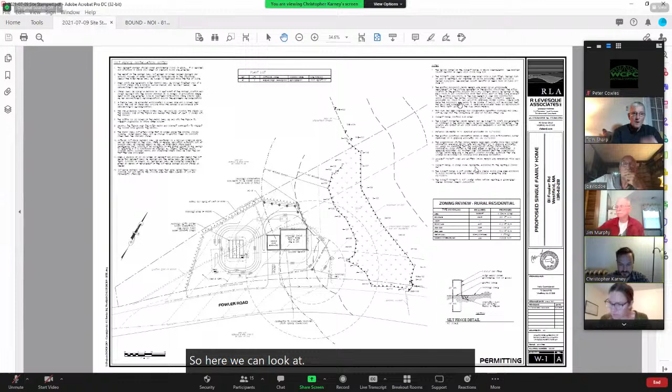So here we can look at... Is everyone seeing this plan? Uh-huh, yes. Just trying to make it a larger size for everybody, but I think I can just zoom in and work well with it.

So the proposed project is a single family residence here, and associated with that is a driveway and septic system. It would be a raised septic system with gravity flow to a septic tank, then to a pump system, and then a raised bed leach field. As you can see, the septic system, including the leach field, is mostly outside of the 100-foot buffer shown here, with the leach field located between the 50 and 100-foot buffer. The single family house has been carefully placed so that it's outside of the 50-foot buffer, and also within required setback lines shown here in the dash.

So as you can see, once we have these zoning setback lines and this 50-foot line, I'll call it a no-touch line for Westfield, we really have a very small building envelope.

Because of that small building envelope and our choice to keep outside of the 50-foot buffer, the home size has been limited to 30 feet by 40 feet. It's a very modest single family home. This would be a house for Pastor Wally's daughter. I believe Pastor Wally's house is up here to the north, and this would be an additional house here.

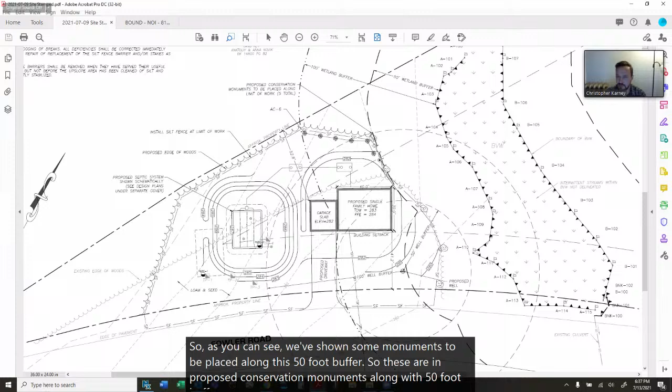As you can see, we've shown some monuments to be placed along this 50-foot buffer. These are proposed conservation monuments along the 50-foot buffer, following the existing edge of woods. I think that makes a lot of sense for a number of reasons.

Keeping the monuments on the existing tree line will allow them to continue to mow this, and I think will give the monuments a better chance of remaining intact over a longer span of time. Also, all the work in the front of the area and work within the 50-foot buffer, there's no tree clearing proposed within the buffer. It's just maintaining the existing tree line.

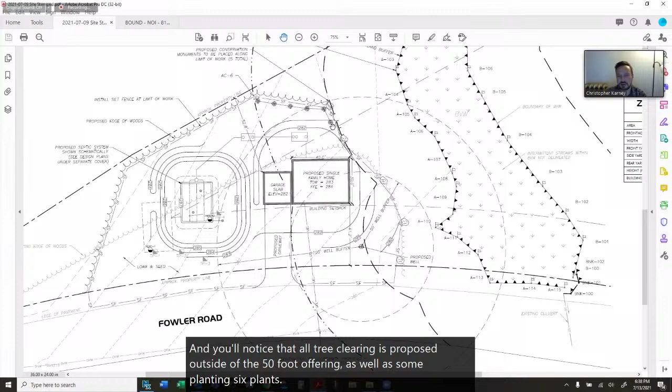As Meredith had noted, there is some tree clearing. That would take place right here. This would be the existing tree line, and then a proposed tree line up here. You'll notice all tree clearing is proposed outside of the 50-foot buffer, as well as some plantings, six plants planted along this edge.

Really, the purpose of this clearing is to allow for the septic tank to be placed here and the pump chamber to be placed here. Because there's a well in the front of the house, we have to maintain buffers to the septic tank. So while it looks like you could place the pumps in the front, that would just flip the well to the back of the property and we'd have the same scenario.

So I feel this is a pretty good design for the applicant's requests. Since there has been a site visit, and I believe this is the second meeting for this, I'm not going to get too deep into the topography of the site, but it does generally slope from the south towards the wetland here. If you have any questions, I think I can answer anything you have.

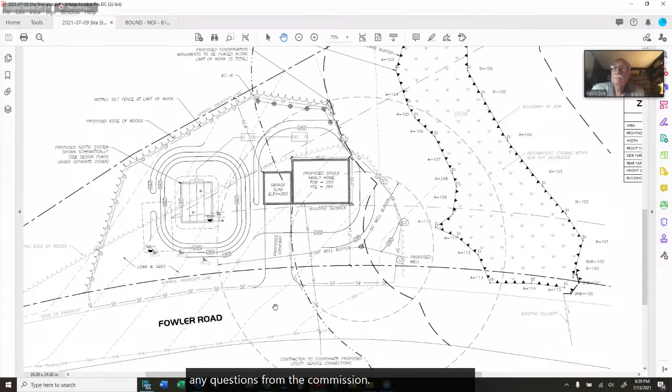Any questions from the commission? No, Mr. Chair. Yeah, Chris, or Mr. Chairman, I have a question. Sure. Chris, I don't think we've met, so welcome.

Nice to meet you. Can you tell me, you thought it made a lot of logical sense to encroach the 50-foot buffer down in that lower right-hand corner. Run that by me again. How does this make sense to you?

Well, so here we're seeing the edge of the hayfield and the edge of the clearing. You'll notice this line doesn't remain changed, it's the same line in pre-development and post-development conditions. I think after the site visit there were some requests to monument the 50-foot buffer line. What I'm speaking to that makes a lot of sense is instead of monumenting a line inside a cleared, grassed area of the site, to instead monument it at the existing edge of trees here.

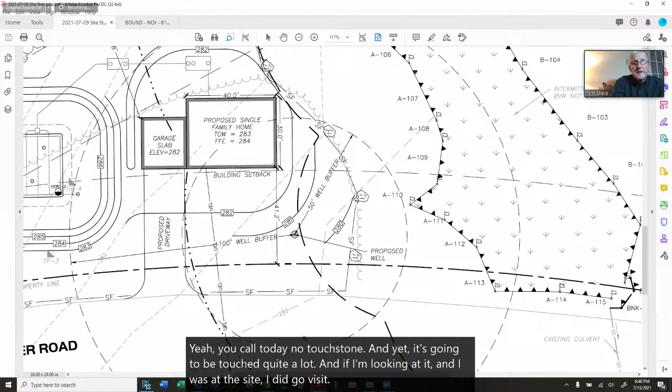Yeah, you called it a no-touch zone, and yet it's going to be touched quite a lot. If I'm looking at it, and I was at the site, I did go visit the site, I'm guessing you're within 20 feet of the resource area. Now you've squeezed from 50, now you're within 20 or maybe 25 feet. Yeah, right there.

And I just have trouble with that. I'm also under the impression that this area you're planning, or the owners plan, is to grass over, to make into lawn. Is that your impression? I think right now it's maintained as a hayfield, so it's in a grass or cleared state anyway, with no natural vegetation other than the grasses that have come in on the site.

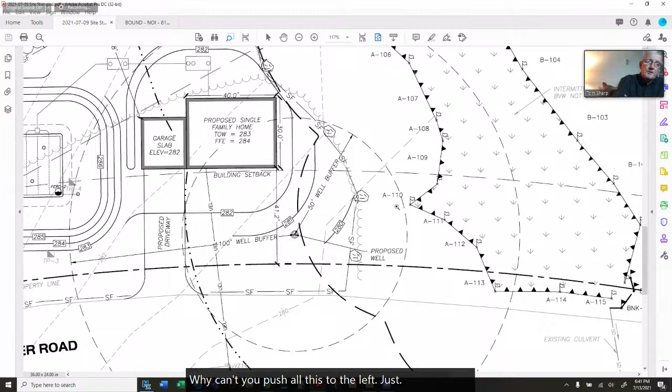Chris, so can't you push all this to the left, scoot it over? I wish we could, I think that's a great idea and a great point. It's this zoning line that comes down to a triangle, and this is the building setback line, that forces us to keep the building where it is. So this property, there's already a home on the property, is that right?

No, there's no home on the property right now. It's maintained as a hayfield, an open field. When you look up the lot, is there a home on the lot? Has this been something about it needs to be subdivided? Is that correct? Yes, correct.

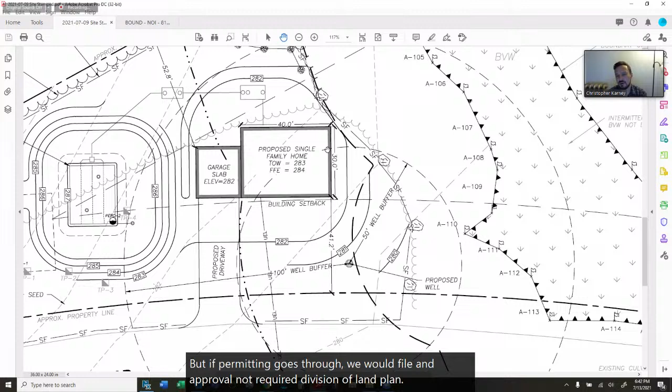It's not shown on this plan, but there is a single family residence for Pastor Wally located northerly of this. So this would be the second home proposed on the lot. But if permitting goes through, we would file an approval-not-required division of land plan, and that would divide this home from the Pastor Wally home and make two parcels, each with one house on them.

I'm assuming the orientation of this site plan is to the north. The home that exists on the lot is also north. Is that correct? I believe that home is over in this direction. I'm sorry, Chris, that got mumbled. Can you say that again? I believe the existing home for Pastor Wally is to the east or northeast of this residence, generally where I have my... Okay.

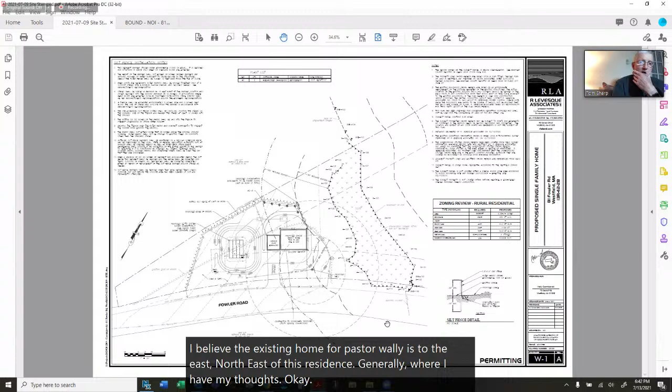All right, well, I just don't like the encroachment of 50 feet, especially since this is a new development. It's not something that is grandfathered. I'm recommending that you go back to the drawing board and try to figure out how to do it without coming 25 feet away from the resource area, and actually taking a great deal of that 50-foot buffer. I'm sure, Chris, that 50 feet has been shown to be critical to protecting what we're supposed to protect, and we've been pretty loyal about protecting that 50 feet. So I have a problem with your site plan.

Okay, Tom. Thank you, Mr. Chairman.

Tom, I understand those concerns, and over at Levesque Associates, we're not trying to cut down trees. I fully understand the use of a 50-foot buffer. I know the Westfield bylaws aren't really written with a specific 50-foot no-touch requirement, it allows some leeway in many situations, but we always try to have our plans respect a 50-foot buffer. For this site, though, I'm just going to restate that we aren't proposing any alterations within the 50-foot buffer. We're maintaining existing use.

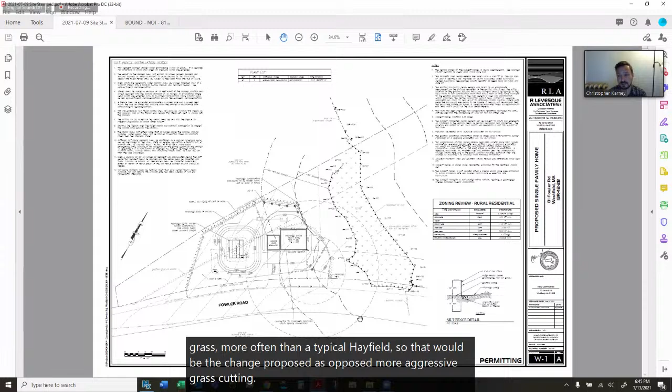I can't comment on a cutting schedule for the grass on this. I'd assume as a residential house, they would cut the grass more often than a typical hayfield. So that would be the change proposed — I suppose more aggressive grass cutting, but that's speculation on my part, and I can't really attest to cutting schedules in that area. I guess what I can attest to is our proposed plan doesn't show an increase of disturbance within the 50-foot buffer. It simply maintains the existing tree line.

Jim? Well, I echo Tom's concerns, but I'm also confused with Chris's response. Is the 50-foot area going to be altered, or is it in its natural condition? I think that's the question I have, and I don't understand the answer.

Okay, I guess I'll slow down and try to explain myself a little better. The existing tree line is shown here in this light gray. This is where we're proposing monuments along this line, so this would be the edge of a natural forest, dividing grassed fields here and a natural woodland here. As you see, there's no proposed work. The well is situated outside of the 50-foot buffer. The work would be placing monuments at the tree line, and then the existing tree line would not be altered at all within the 50-foot buffer.

This being the 50-foot buffer line, I assume this area would be maintained in a very similar fashion as it is in existing conditions. So, all right, so to Tom's concern — will the landowner alter anything, or will the 50-foot area be maintained in a natural condition so they can protect the resource area?

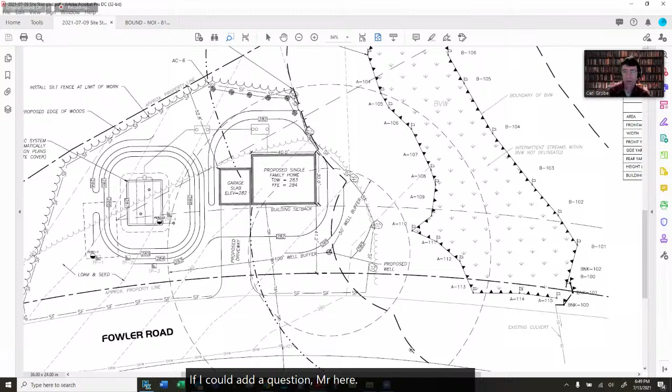If I could add a question - for the monuments you're suggesting, those rocks that are going to delineate the forest edge, I'm not clear on what they would indicate. That would be a line of no disturbance. So, conservation monument to state that no activity will be beyond these monuments.

We would follow Westfield's lead for the type of monument placed in these cases. Yeah, and that confuses me as well, in that those are usually placed at the 50-foot line and not inside. I think because of the applicant's hopes that the existing tree line can be maintained in its same state, they didn't want monuments placed along a 50-foot buffer that would go through the hayfield. So at that point we are placing monuments at the tree line, and those would be the areas that would not encroach on the city's wetland resource area.

It would seem to me, for ultimate protection, we'd want those monuments clearly indicating that it's a no-work, no-alteration zone, meaning on the 50-foot line.

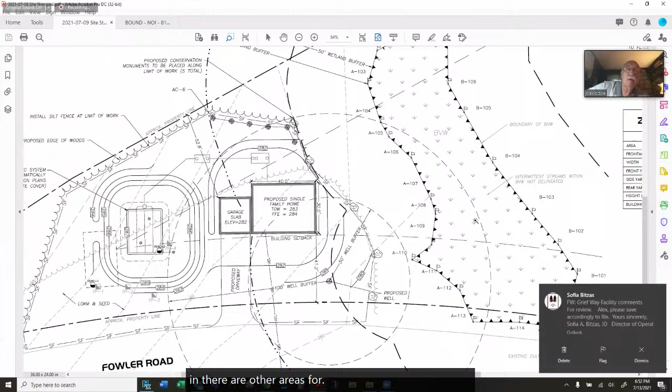There are other areas for lawn around this house, above it and below it. And you're right, our rule of thumb is that nothing occurs inside the 50, especially with new projects. Sometimes it's hard with older projects, but with a new project we can be firmer on where we want to put these monuments.

I'm ready to give you a motion if you're ready for one. If I could just try to summarize your comments - since we're not here to argue with you - if it's the conservation requirement that no work will take place within the 50-foot buffer, I'd like to clarify that position and pass it along to our applicant and let them make the choice for the next meeting.

I think the consensus, as I'm reading it, is that the commission would like to have those markers on the 50-foot line, not 25 feet inside the 50-foot line. Is that correct, Commission? Yes, that's my opinion. Tom? Yes, that's what I've been arguing for. Carl? Yes, I agree. I'm not taking a vote, but I think the applicant or consultant gets the idea that the commission would like to keep the 50 as the place where the markers are.

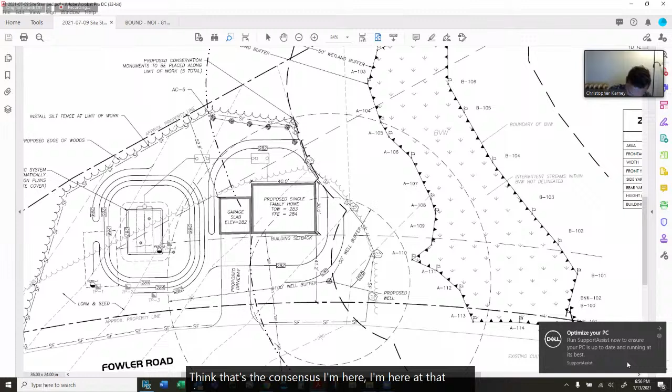Mr. Chairman, I'll make a motion that we continue this until our next meeting on the 27th. Do you have a second? I'll second that. Any further discussion at this time?

Seeing none. Tom? I'll vote yes. Jim, yes. Carl, yes. Cliff, yes. And I'll vote yes as well. Thank you, Chris.

All righty, item C is 898 Southampton Road, mobile home park improvements. So in accordance with the provisions of Massachusetts General Law, Chapter 131, Section 40, a public hearing will be held on July 13, 2021 at 6:30 p.m. by virtual meeting regarding a notice of intent submitted by Heritage Residents Association for improvements to the mobile home park located at 898 Southampton Road.

Do we have a proponent for this project? Yes, Mr. Chairman. Good evening, everybody. My name is Brent White from White Engineering in Pittsfield, Massachusetts, on behalf of the applicant. I'd like to thank you all for your time this evening. Welcome, Brent.

The nature of this project is part of a much larger happening at the park. Approximately a year and a half ago, the residents actually acquired ownership of the park, and as part of their acquisition, they've retained our firm, along with a team of consultants, to develop a master plan to help improve a number of elements of the infrastructure on the property. One of the areas of greatest concern is their water distribution system, the age and condition of it. There's a fair amount of leakage and issues within the system, and the roadway itself is certainly in need of great repair.

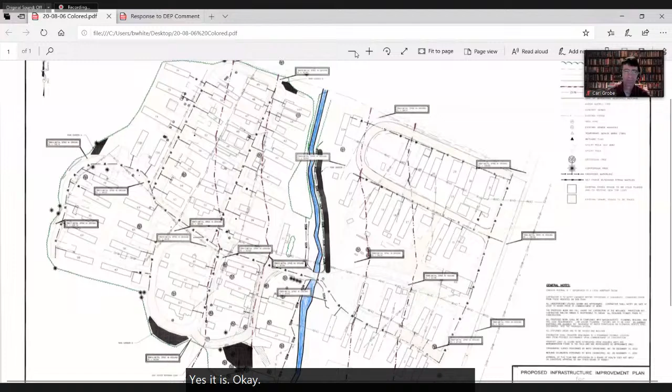Just to orient you to the site here, off to the right is Southampton Road. Then we have a number of driveways that lead throughout the park itself, if you were to follow my cursor. Obviously the primary reason we're before you this evening is that Arm Brook essentially bisects the park itself in a north to south direction here.

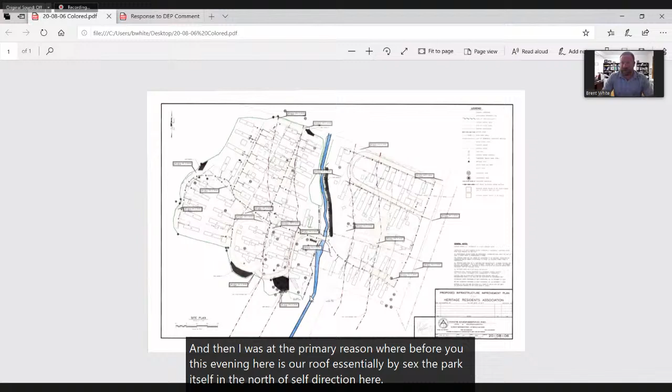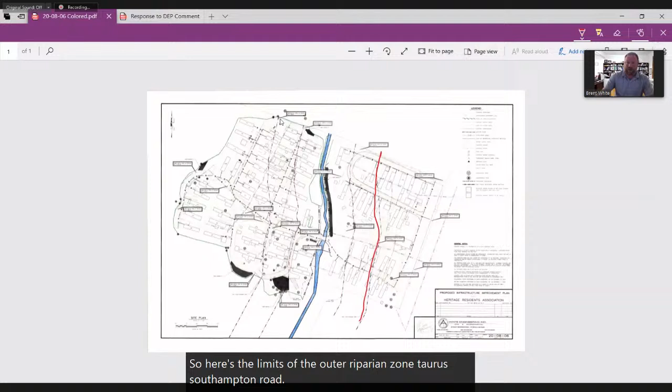Obviously we have our 200-foot riverfront area, so the limits of your jurisdiction here may be difficult to see. I'll try and do this in red. So here's the limits of the outer riparian zone towards Southampton Road, and here are the limits of the outer riparian zone to the west.

One of the things you'll also note throughout this sheet are these dark shaded areas. Those are areas where we've proposed rain gardens and buffer plantings to help mitigate not only where stormwater accumulates throughout the road network, but also in an effort to improve some buffer plantings within the inner riparian zone of Arm Brook.

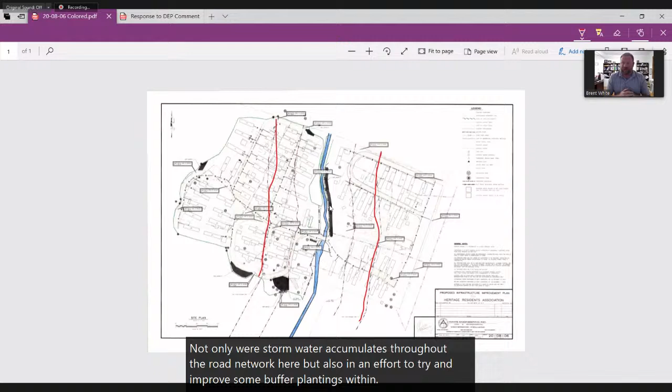Again, the goal is to come in and completely reconstruct the water distribution system throughout the park. One of the goals will also be that as part of this process, it will allow for greater isolation of the water system throughout different parts of the park.

We've had the opportunity to work with a number of mobile home parks, and what we've found through this process is the value in having a number of different shutoffs. First off, these will be state-of-the-art materials going in, so we certainly expect to have very little, if any, maintenance issues for quite some time once this project is completed.

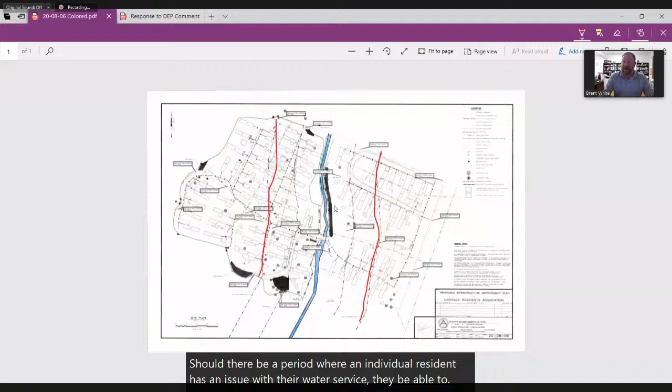But one of the goals will be, should there be a period where an individual resident has an issue with their water service, they'll be able to find isolation valves just upstream and downstream of that unit, really minimizing the number of residents who may be impacted by needing to shut off water service to complete whatever repair may be necessary.

As part of the repaving of the roads here, we do have some areas that are existing gravel that we intend to pave, and existing gravel areas that we intend to restore to lawn.

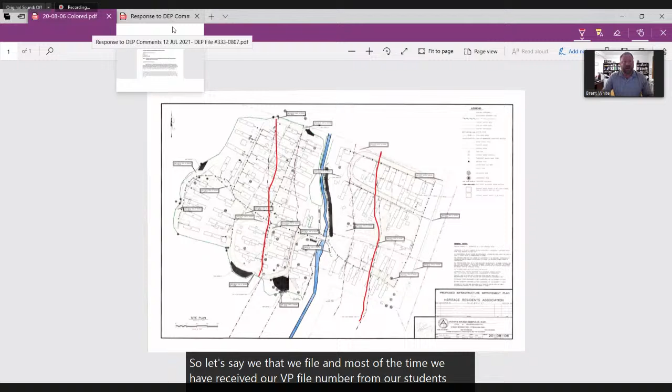If I can pan here. So as I stated, we filed our notice of intent and we have received our DEP file number from Mark Stinson. He did have a number of comments, and I'd like to share my screen with the cover letter that I submitted to the agent earlier today, which has the comments provided by DEP as well as our response to those.

I'll just start off by saying that I think, frankly, the site visit will allow us to look at some of these comments in greater detail and understand what is going to be the most appropriate response to that. I did have some follow-up with Mr. Stinson since we submitted this.

I just tried to make it clear to him that my submittal this evening is not the resolution of these items, and that our hope would be a chance to hear your comments this evening, and that walking the site will allow us to positively address all of these comments.

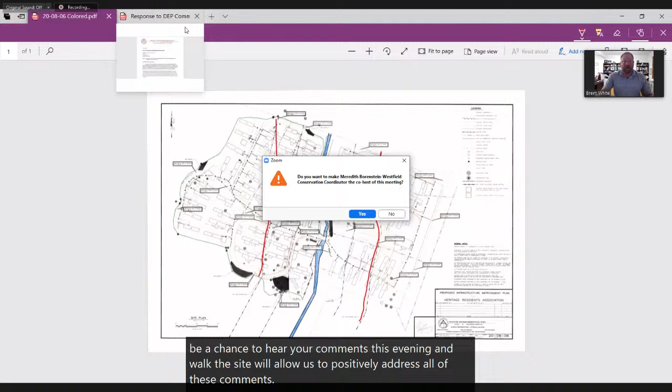I will not read them verbatim, but the first comment was with respect to Arm Brook being designated as a cold water fishery.

Okay, can you please go back to the map and enlarge it? Show us on your plan exactly where the project is going to occur.

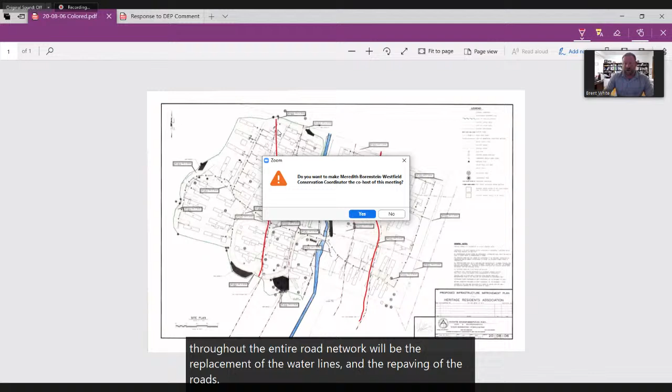The project is going to occur on the entire sheet of paper. Throughout the entire road network will be the replacement of the water lines and the repaving of the roads. What I've tried to highlight here in red is the limits of the riverfront area to the east and west.

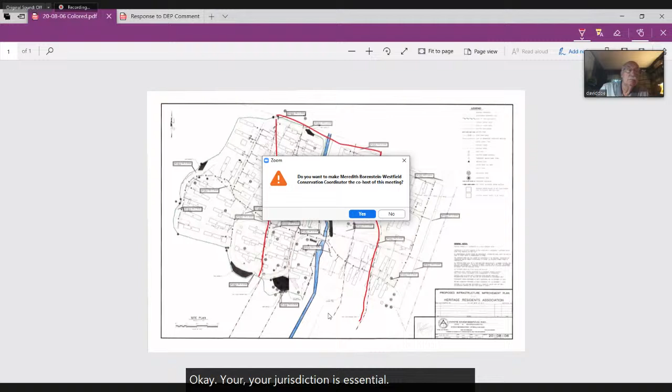Okay, so your jurisdiction is essentially what I've enclosed in red here for your reference. There certainly is a fair amount of work that will occur outside of the riverfront area. However, we do plan to procure this and do all work at the same time. All right, thank you. You're welcome, sir.

The first comment was with respect to the fact that Arm Brook is a cold water fishery. The stormwater checklist submitted with the notice of intent, item 6, has us identify if there's a critical area within the project area. I had not checked that box. However, we will submit a stormwater checklist that correctly identifies that Arm Brook as a cold water fishery does meet that characteristic. That's more of an administrative matter, but one we're easily able to address.

The second comment was questioning the number of exempt activities under the Wetlands Protection Act for work within buffer zone and riverfront area. Clearly, in our opinion, the work associated with the water line repairs within an existing driveway, whether public or private, the utility work is clearly an exempt activity. I believe what Mr. Stinson was questioning was whether the exemption applies, even though this is a public way in the sense that all residents have the right to pass over it. This is not a municipal public right of way where you'd have a 20 to 30 foot wide road with a shoulder owned by the municipality.

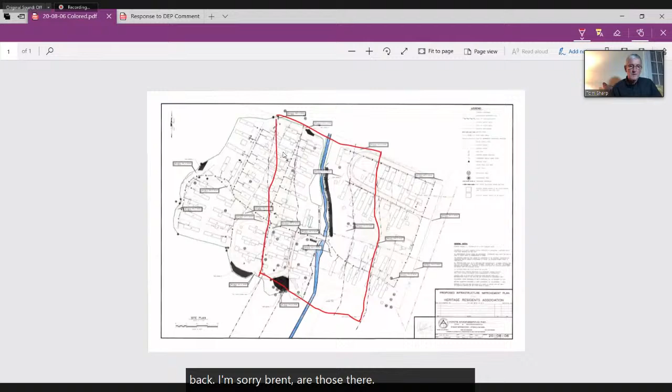Yeah, are those trees still there, Chris? I'm sorry, Brent, are those trees still there? I'm trying to.

We did identify some trees, but we didn't identify every specific tree in that area. That's why I was hoping at the site visit it would be clear from the aerial photo which tree I need to be looking for. That was really outside our work area, in terms of staying within the roadway and doing the water service lines, but we're happy to give it due attention at the site visit. If we feel there's clearly unpermitted clearing or cutting, we would plan to address that with our revised plans.

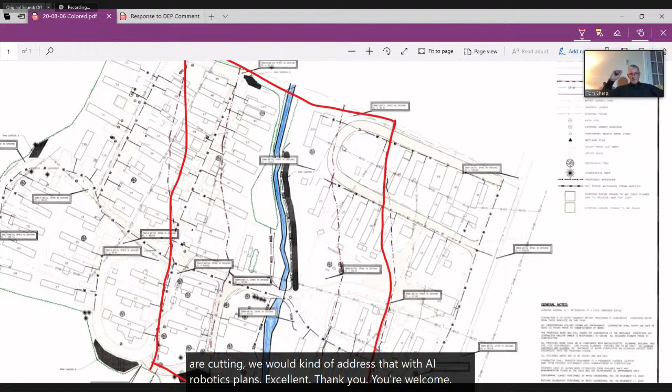I just don't want to speak out of turn one way or the other. If there's clearing that was done, or mowing right up to it where it shouldn't have been, I think we can work with the Residents Association to address that.

So, sorry for all the back and forth. I don't know how, between my Microsoft Edge and the photos, to show everything in one item here. So we'll go back to the...

So with respect to the discussion of rain gardens, you saw those dark shaded areas. From our perspective as designer, we're dealing with relatively small subcatchments, areas where the roadway would drain to various low spots. Through our work, not only last fall but working with the associations and their trustees, they've more recently been able to identify really problematic localized drainage concerns where people have ponding water up to their unit, which is not only a nuisance in summertime but becomes more of a slip and fall hazard in wintertime.

As part of mobilizing with heavy equipment, we have the ability not only to pitch the roads to drain the way we need, but our goal is also to provide depressed areas where that water can physically drain and get off the roadway. We propose rain gardens because, in terms of overall sediment load, I thought a better solution was to show a rain garden with more natural vegetation covering the wetted footprint at the bottom, compared to a riprap sediment forebay, which would be exactly what it sounds like.

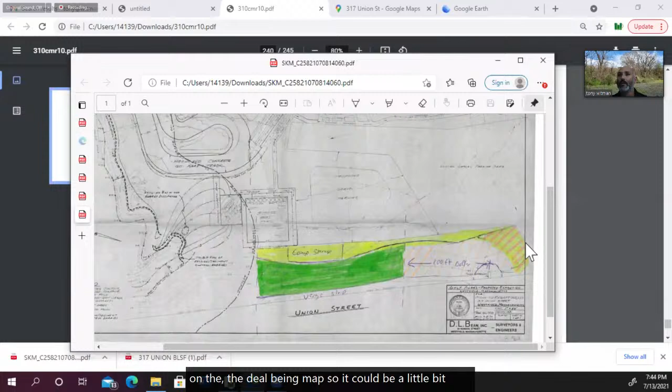This area here would be the buffer area maintained from the paved waterway. And this corner of the property, which was the previously developed entrance of the parking lot, we'd be cleaning that up, and then cleaning up the edge of our parking lot here.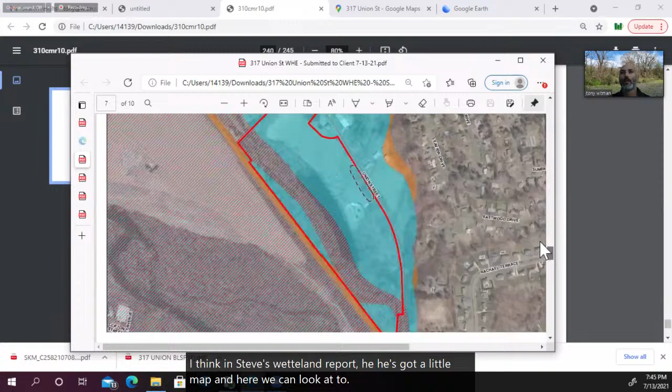I think in Steve's wetland report he's got a little map we can look at too. Let's see where it is here. So that's the total lot. He's got a map here where he's delineated some of these areas.

These hash marks are the lower floodplain. This area here is really heavily disturbed, whether it was used for compensatory storage or the ground was just disturbed and moved around. It's a little bit unclear.

I thought initially, when Meredith and I had looked at it, that it was dug out for compensatory storage, but actually looking at the earlier maps in the NOI, they filled some of it in as part of that process. So it's hard to know exactly why this rectangular depression exists there.

Over here, I think this is indicative of the buffer zone around the waterway here. That's another map, sort of showing those areas.

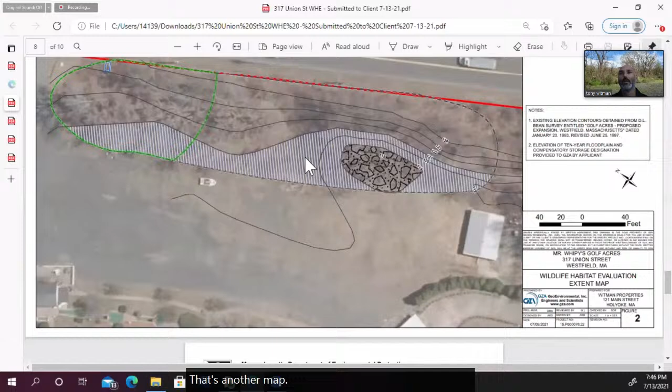So Tony, nothing in the green circle gets disturbed, is that correct? In the green circle, we would be hand removing invasives, primarily the bittersweet. And then along the edge of our parking lot is parking lot maintenance.

It's hard, when you're looking from above, you're seeing the canopy, so the canopy of everything actually probably looks a little bit bigger than the area itself. But the edge of the parking lot, we'd be cleaning up that piece. Inside here, we would only be hand pruning the bittersweet. Our intention is that by removing that stuff, the native stuff will fill in and allow for natural understory in the area, up to about perpendicular with the mini golf fence, which is probably about here.

And I'm kind of repeating some of what you said, but your hope is that will provide some kind of visual barrier for the home across the street?

I think so. If we go back to the other picture, let's see here. Okay, if we look at this picture, if this is the line we're planning to work with, then there's going to be quite a bit of a buffer here.

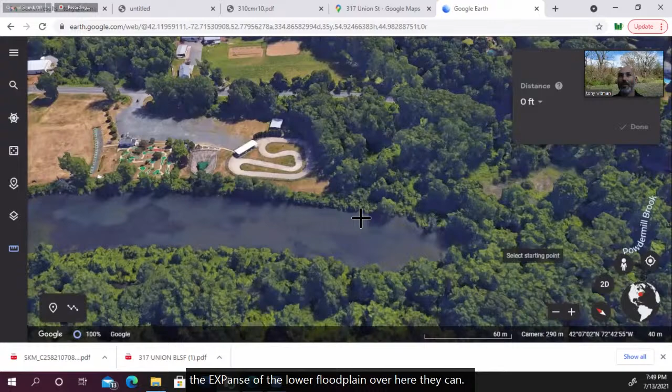One is that any wildlife disturbed in this area will have some familiar space to go into. And if they're getting water out of the waterway, they'll be able to travel down that way. If they're associated with the expanse of the lower floodplain over here, they can migrate this way. And then it'll help to phase in the impact of the work.

And Tony, how far to the right on this view will your limit of work stop?

Is it as far as the clearing? Right about here. So this corner of the pit track, if you made a perpendicular line up, there's a couple different large trees here, and we'd be going in between the two of them. It might be difficult to tell from the ground, but this group of trees here would be going around that group of trees here. And then this group of trees over would be left the way it is. So I would say perpendicular with this corner of the pit.

Stop. And if you got a green light, where would you start? Would you start with the selective cutting? We would more start over here, come along the edge of the parking lot, and it would all happen in a day.

All right, you've answered my question. Yeah, that's what I wondered. I thought phased in meant you were going to do some and then wait a month or whatever, but you're going to do it all at once, which makes sense. It's about half of what the original scope of work was. So that's what's phased in, is the original area, and the area Steve studied included the entire peninsula, and we've cut it down to almost half of that.

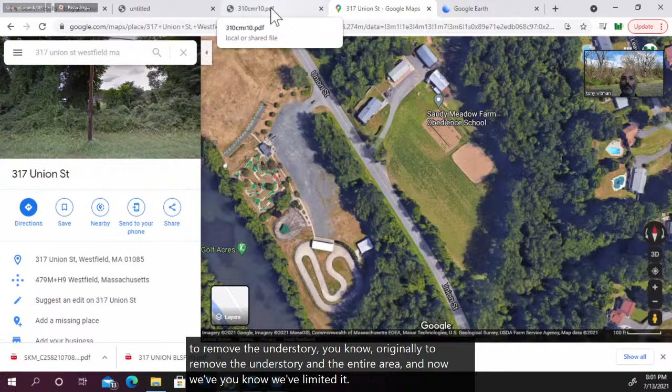Yeah, let me—I do want to say the plan has changed, but the work area has gotten progressively smaller and smaller. I don't think there's ever been a time that what's been presented is different than what our intentions were. It was always to remove the understory; originally it was to remove the understory in the entire area, and now we've limited it quite a bit. So I just wanted to say I don't think I've made any different representations to this commission from the start, except that we're changing and shrinking the area that's being affected.

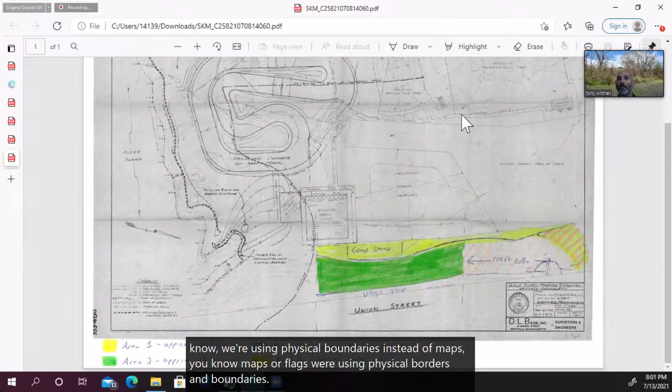This is one of the plans here, and you can see we're using physical boundaries instead of maps or flags. We're using physical borders and boundaries. So the fence for the mini golf course is one of those boundaries coming perpendicular down here to Union Street. And then the other one is the corner of the pit stop or the pit house coming down here. So those are the physical boundaries.

The other thing, I guess, that's probably bigger than the buffer zone here, but that's what we're proposing. So if you looked at it, you know, we're still in there, I guess.

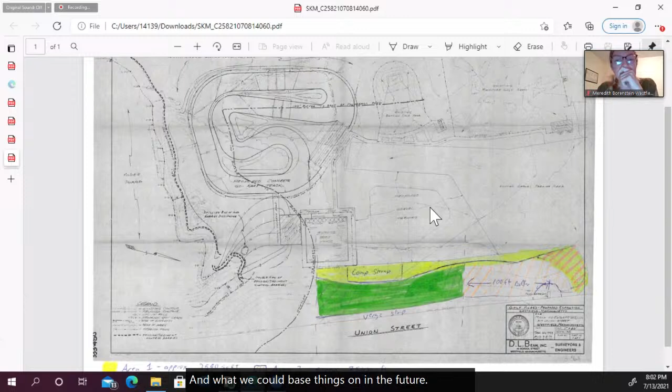Okay, thank you for that. I understand a little bit better what exactly you're proposing and what we could base things on in the future. And you talked about the...

Could I add? Can you show the other plan? Meredith, excuse me, before Tony shows the other plan - Tony, it would be helpful, and I understand what you're showing here graphically, but it would be extremely helpful if you dimensioned it out. You do show the 100-foot buffer, but it'd be helpful if on the plan you write this is X feet by what, so we have length and width, so we know what we can work with. We're seeing it graphically.

Thank you. Yeah, we don't have a physical dimension written on there. I've put the approximate square footage on here on the bottom, so you have a sense of what that is. And then, as Meredith was saying, the other stuff was measured from the satellite picture.

And you know what Meredith was saying, how I was saying it wasn't jurisdictional - I'm not sure that's the language on here. It says this area is believed to be outside of the resource area defined under 310 CMR 10.60. So we all agree the whole area is jurisdictional because it is 100-year floodplain, but 10.60 goes on to describe - actually 10.57 is where it describes which habitat is considered significant within the 100-year, and it's anything in the 10-year or anything described in 10.60. So that's why some of this area here, the pieces that are outside of the buffer zones and outside of the 10-year, aren't presumed to be significant under that.

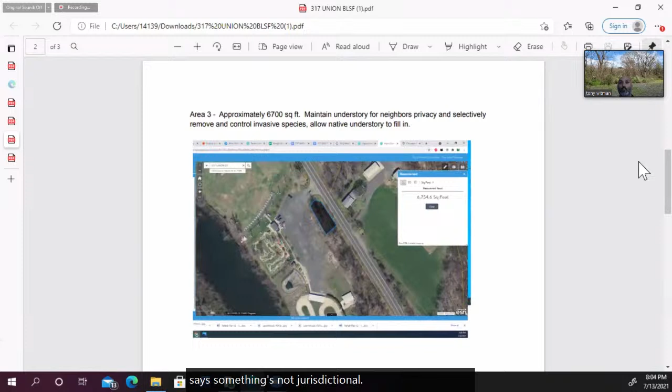So right here outlines the area. We maintain the understory for the privacy, selectively removing, controlling invasive species.

And I understand the 6,700. What I'm asking for is length and width dimensioned out there. So just write it on your plan that this blue border with the black inside of it measures X by X. I could do that for the commission. Thank you.

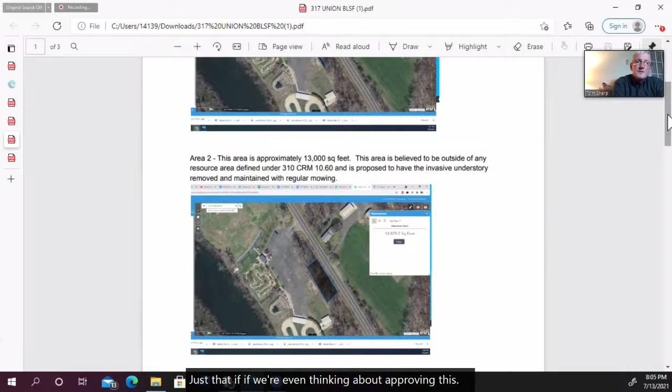Other questions from the commission? Just that if we're even thinking about approving this tonight, we haven't talked about area 3 or area 5, that the corner, the parking lot. I'm assuming the RDA includes that. Am I correct? Correct. And there's a picture here, again, to show that we've trimmed down the size of that a little bit.

Mostly after meeting there on the site visit, some points were made that, well, why do you need to clear such a big area for parking for conservation trails when you don't know how many people use the trail? And so that's valid. So maybe we don't need to clear as much of the space. So we've outlined an area here that's quite a bit smaller. Still going to give us access into the facility here.

All of this area is outside of the 10-year. It's in the 100-year. It's not a habitat that would qualify under 1060. So habitat assessment wouldn't necessarily apply to that, and to be permissible - I'm not sure to what degree that would be necessary to consider square footage, but we did shrink it down a little bit.

And Tony, how will we know in the future that polygon - how will we know that what we're approving on this map is what gets mown? Well, I guess you'd have to keep coming out and do site visits and study it. I don't want to do that. Well, I'm just saying, that's what we're trying to deal with here, is trying to figure out what we approve. What we approve is what actually gets done.

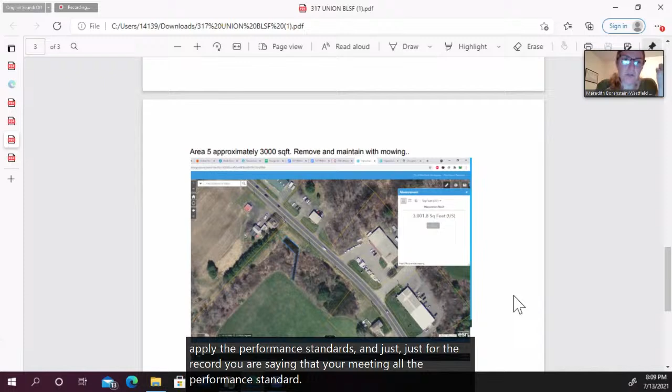Okay, but it's still in a resource area, so we still have to apply the performance standards. And just for the record, you are saying that you're meeting all the performance standards because you're not interfering or adding volume. Correct.

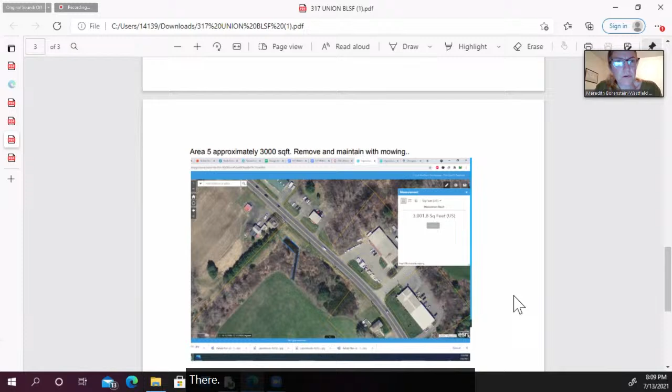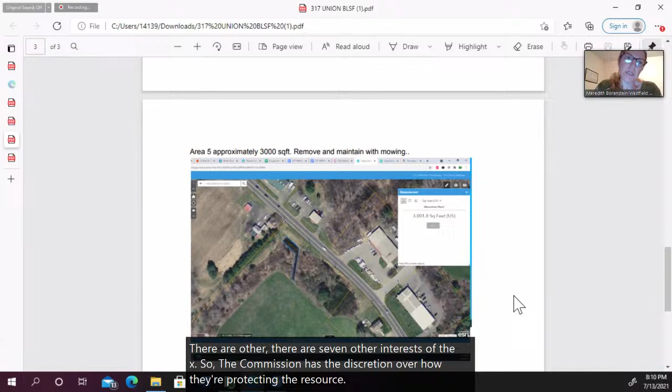And you're saying you don't have to do a wildlife habitat assessment because it's outside the 10-year floodplain. However, it's still up to the commission. One of the interests of the Wetlands Protection Act is the protection of wildlife habitat. There are 7 other interests of the act. So the commission has the discretion over how they're protecting the resource and to what extent.

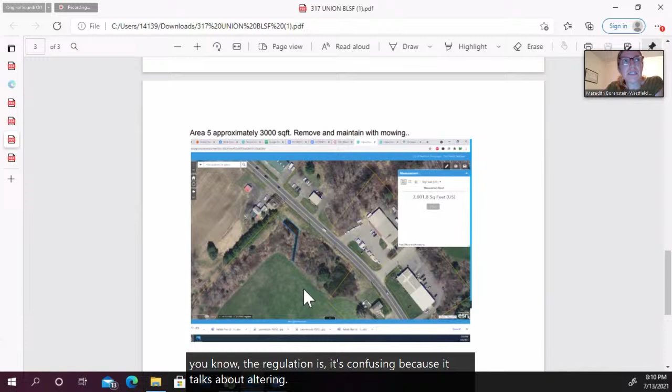Correct, and 10.57 is the work standard for that resource in bordering land subject to flooding. So the regulation, it's confusing because it talks about altering up to 10% or 5,000 square feet of BLSF. I have the regulation. If we go to page, let me see here, a different one, page 212.

I guess ultimately the commission has the discretion on whether this is significant wildlife habitat, and this is our 3rd meeting, so I think we have to come to some sort of conclusion. Under definitions, if we just look at what the reg kind of says here and read through it together... I'm worn out from meetings too.

Okay, 10.57, 2A. Okay, the bordering land subject to flooding is estimated as the maximum lateral extent of the 100-year floodplain. Okay, it's on 214 here. Scroll to the performance standards. Oh man, okay, hold on. I was just... What's the concern here, Meredith?

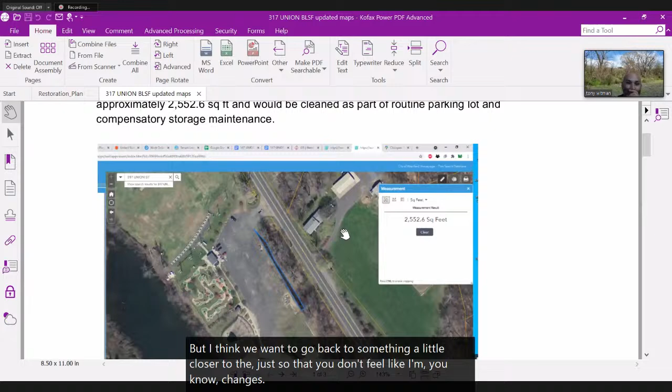This is what we have right now, everyone. So clearing the edge of the parking lot, that's one area. And Tony did estimate the square footage, so we don't know exactly width and length.

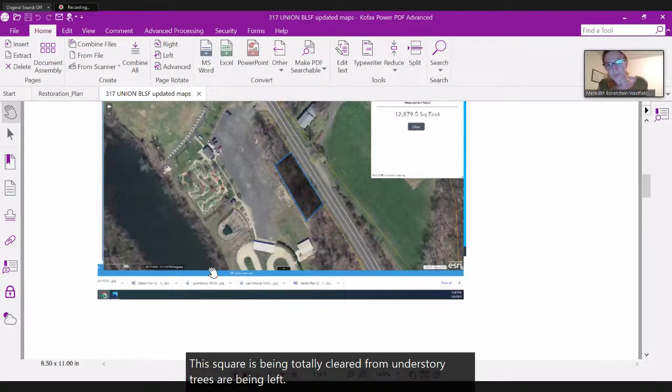Then the area he was estimating, based off of the go-karts and the mini golf, this square is being totally cleared from understory. Trees are being left. And correct me if I'm wrong, because this is my just summary of what we've been told in the past month and a half.

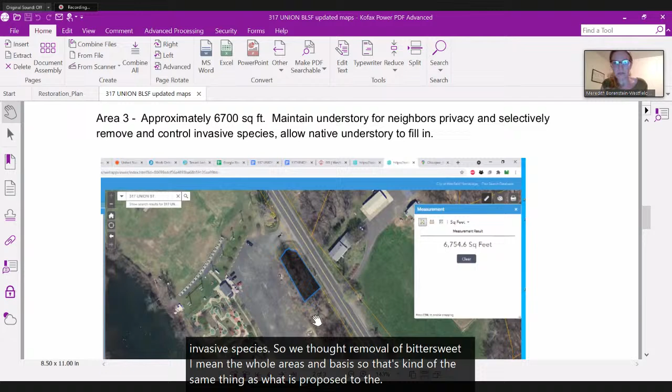This area I thought was being left alone, but it seems now he is going to just control invasive species. So is that removal of bittersweet? I mean, the whole area is invasive, so that's kind of the same thing as what is proposed. That's the south. And then we do have the north area here.

Let me just go to this one. Where'd it go? Meredith, if I can ask one question you can help clarify from a regulatory perspective, at the north end here: is there a difference between clearing the hockey puck shape or the hockey stick shape and clearing the 2 acres that would go from the trees down to the house here?

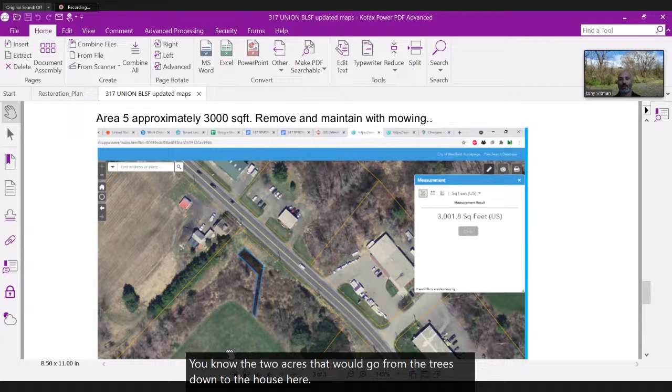I mean, it's all in bordering land subject to flooding. It's all subject to regulations. And clarify for me, what are those regulations with respect to wildlife and habitat?

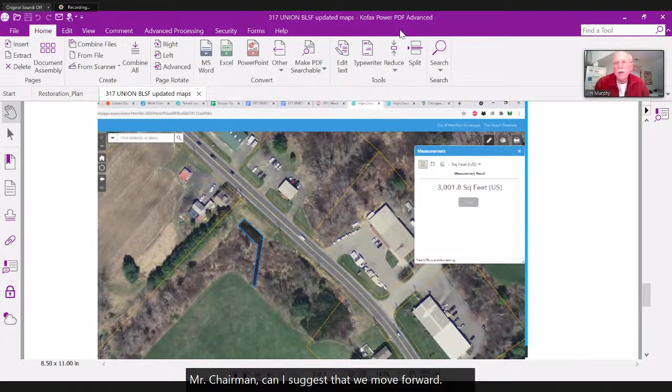Mr. Chairman, can I suggest that we move forward? We really have quite a large agenda tonight. And if we have to continue this, maybe it's really to the benefit of the applicant and to everybody.

I'm prepared to put a motion on the table for that. I think we're still in a quandary of which way to go. And so I'd say that's okay. I think we need a better source document, or perhaps use those maps but have more written explanation. So I can work with Meredith and Tony and see what's the best way to go from here.

Thank you, Mr. Chairman. I'd like to put a motion on the table that we continue this until July 27th. Do we have a second? I'll give that a second. Any further discussion?

Just that, it may not really be appropriate for the discussion, but Tony, one of the things exciting about this project was your nature trails. And they weren't even discussed tonight. They're not on your plans anymore, unless you're planning to come back to us with a new RDA. But I don't want to discuss it because it's probably not even the correct discussion.

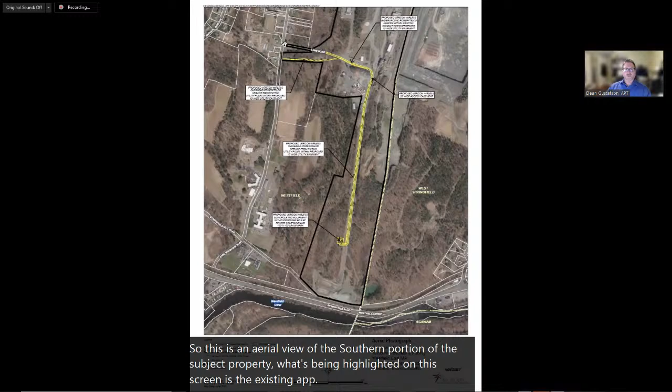This is an aerial view of the southern portion of the subject property. What's being highlighted here is the existing access road to the quarry. I'm following it with my cursor. There's a weigh station in through here, and then a gravel access road that heads to the southern portion of the property. This is a rail car loading area.

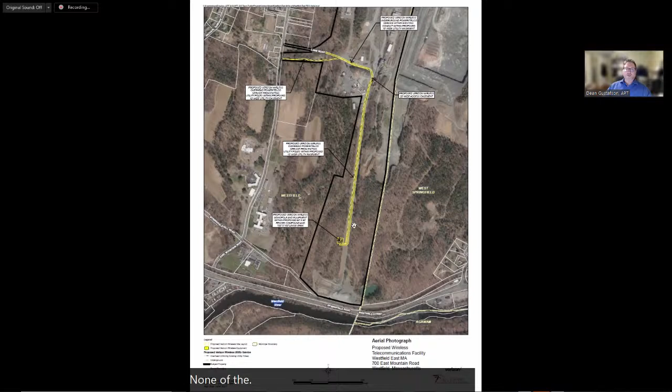The proposed facility will utilize this existing gravel access road, and along the west side of that, the facility will be constructed with a short spur gravel access, 12-foot wide. None of the project activities are located within any wetland resource areas, associated buffer zones, or riverfront area. Where the tower facility is being proposed, there's no wetland resource area located within 400 feet.

What we do have is an existing overhead utility run that comes from East Mountain Road, following my cursor through here, just south of the access road that provides access into the quarry. That aerial distribution line runs over an unnamed perennial stream that flows south, with associated bordering vegetated wetlands. What we've shown here is the delineated limits of the wetland resources, both north and south of the existing access road and this distribution line.

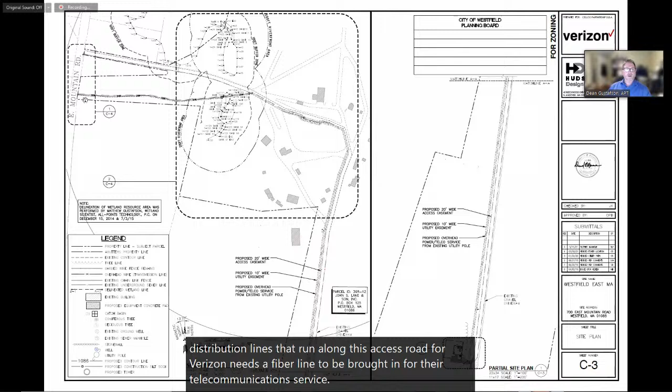The reason I'm pointing out this distribution line is that power is already being provided for a large degree of the project. There are distribution lines that run along this access road, but Verizon needs a fiber line brought in for their telecommunication service. We'll be utilizing this existing overhead distribution line, which then goes into existing conduits and a manhole, and eventually back overhead. So there won't be any ground disturbance associated with that activity. This is the only work activity that has any intersection with either the Wetlands Protection Act or the Westfield wetland bylaws.

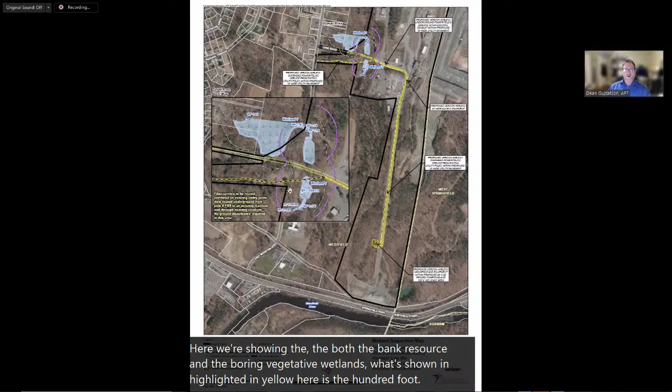This is our wetland map put on an aerial photograph to provide some additional clarity. Again, what I'm following here is the existing overhead distribution line, and then it goes existing underground, and then overhead. Here we're showing both the bank resource and the bordering vegetated wetlands. What's shown highlighted in yellow here is the 100-foot buffer zone, and this purple line is the 200-foot riverfront area.

So this is the same information provided on the project site plans. Again, we'll be utilizing the existing overhead distribution lines, hanging the fiber line over here. There's existing underground conduit to this utility manhole, existing conduits that will be placing the fiber line under. Then from this manhole, we'll be providing a new underground conduit to this utility pole, and then it'll be overhead the rest of the way.

So the only earthwork in proximity to the resource area starts at this existing utility manhole and heads to the east. So we're well beyond the 200-foot riverfront area associated with this nearby resource.

And then this is kind of a blow up of the proposed compound. It's a 50 by 50 fenced compound, gravel base. There's a concrete pad for equipment cabinets. There's a propane fired emergency backup generator. And then this is the 125-foot utility pole, telecommunications pole. And then we have a 12-foot wide gravel access drive being proposed with a short turnaround, that'll tie into the existing gravel access road for the facility.

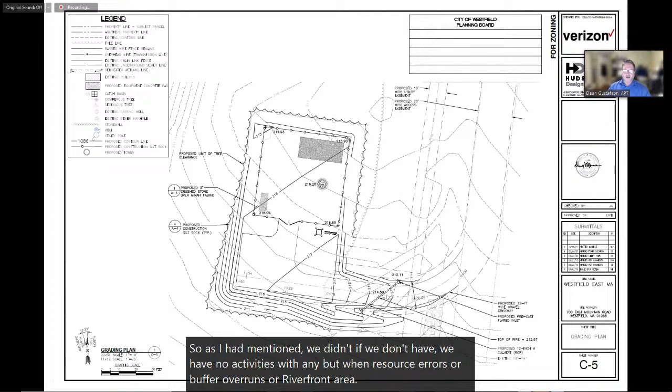So as I had mentioned, we have no activities within any wetland resource areas or buffer zones or riverfront area. So we're respectfully requesting the commission issue a -4 determination for this project. And that's the conclusion of my presentation. I'm happy to answer any questions.

Thank you. Yeah, Mr. Chairman, go ahead. In your RDA, did you ask for a -2 or a -4? We requested a -4. What's the difference, Dean? The -4 is the recognition that the project doesn't have any activities either under the Wetlands Protection Act or the bylaws.

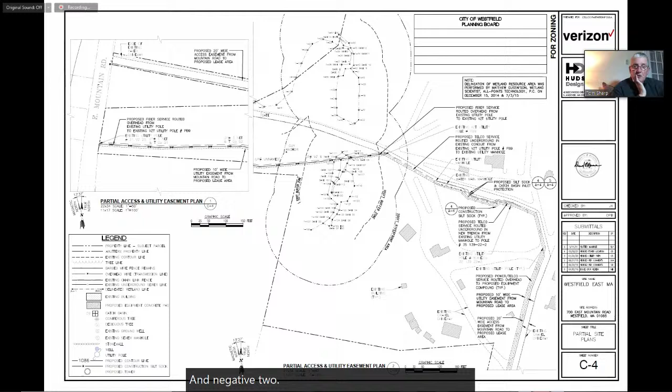And -2? I'd have to look up the difference, but I think -2 is that the work activities won't have an adverse effect to the resources, but there is some jurisdiction under the Wetlands Protection Act regulations or the bylaw regulations. But I'd also defer to Meredith if she could provide any additional clarification on that matter.

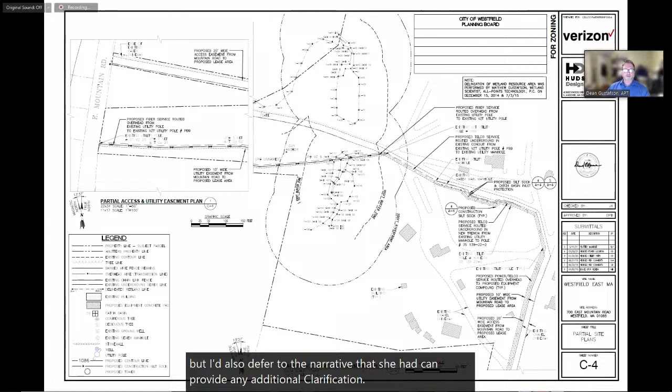Yeah, let me just read what the choices are. So a -2 is: the work described in the request is within an area subject to protection under the act, but will not remove, fill, dredge, or alter that area. Therefore, the work does not require filing a notice of intent. And a -4 is: the work described in the request is not within an area subject to protection under the act, including buffer zone. Therefore, said work does not require filing a notice of intent unless and until said work alters an area subject to the protection under the act.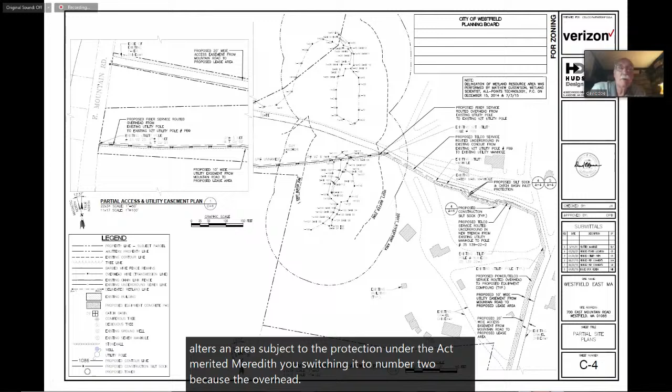So Meredith, are you switching it to a -2 because the overhead line goes over a wetland? I've never issued a -4 before, but my inclination was to issue a -2, because the overhead wire goes over riverfront, and BVW, and buffer zone. It's over the resources, so it's a little weird.

Yeah, I'm sorry to interrupt, Meredith. I mean, for the applicant, we'd have no objection whether the commission issues a -2 or a -4. So I understand your perspective, it is kind of an oddball. We have no actual ground disturbance within the resource areas, but they are going to be stringing a line over them. So I can certainly understand the interpretation for a -2 may be appropriate in this case.

I'd be more comfortable with the -2, I guess. I have one question. Oh, sorry. It accomplishes the same effect, you know. Yeah, it's almost the same outcome.

Go ahead, Meredith. No, I just wanted to know, how will they string the line without touching the ground there? Yeah, so, yeah, it's a great question.

I mean, right now, this access, this distribution line, it is a pretty wide, clear path off of East Mountain Road. And it provides access to, I believe, this pole right here at the angle point. From there, you start losing, you're dropping slope, you get into mature vegetation. So what they could do is they could get a bucket truck up to this pole and provide some support. But to be able to bring the line from this point to this pole is going to require some man work on the ground to bring in a fiber line and get it across. And then they'll probably have a bucket truck support here, string it up to the top, and then they can take the slack out of the line.

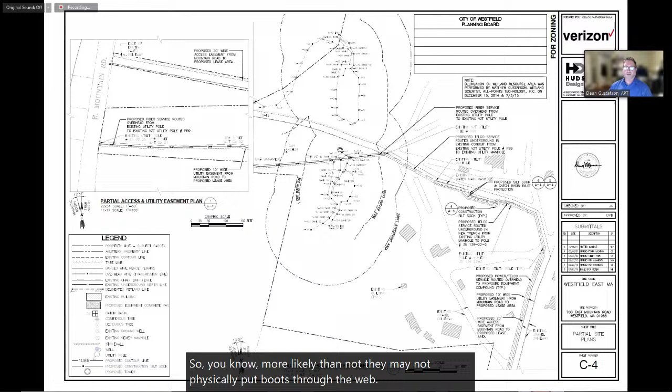So, more likely than not, they may not physically put boots through the wetland. They may try to skirt around, but may end up walking across the wetland edge, though it'd all be on foot. There's no vehicle access through this area, so there wouldn't be any vehicles encroaching into the buffer zones within this area or the resource area. It'd just be by foot.

Okay, I think because of that, number 2 is appropriate. Yep, that's fine. Any other questions from the commission? Seeing none, any questions from the audience concerning this project?

Seeing none, I'll entertain a motion to close the public meeting. So moved. Second. Further discussion? Seeing none, all in favor? Carl, yes. Jim, yes. Cliff, yes. Tom, yes. Thank you. Great, thank you, folks.

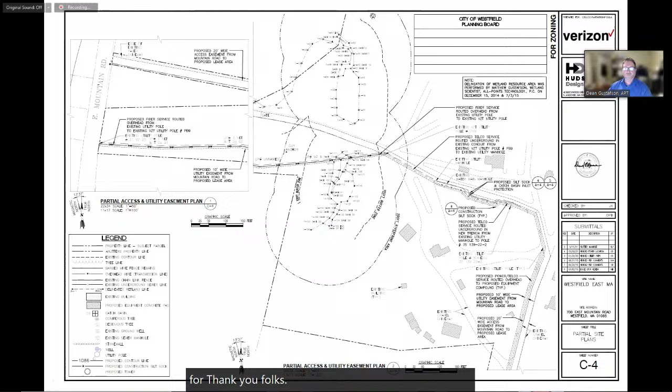All right, item D, City of Westfield. Oh wait, don't we have to issue... let me make a motion first. Oh, I'm sorry, I'm jumping ahead. Go ahead.

I'd like to make a motion that we issue a -2 determination with the following condition: that the commission is notified of the work start and work completion dates, and also that erosion controls will be installed and approved by the commission or the coordinator prior to work commencing. That's my motion. I'll second that.

Are erosion controls on the map? Are they necessary, Meredith? Yeah, I'm sorry, I was going back and forth in my notes between a -2, which means they're just free to do the work, or a -3, because I wasn't sure if there was disturbance in the buffer zone near the existing utility right of way when I wrote the notes earlier. In that case, let me strike erosion controls from my motion. Obviously that's not necessary.

Okay, under -2, Tom, please recite the words in parentheses there. Number 5. Sure, the -2 determination means the work described in the request is within an area subject to protection under the Act, but will not remove, fill, dredge, or alter that area. Therefore, said work does not require filing a notice of intent.

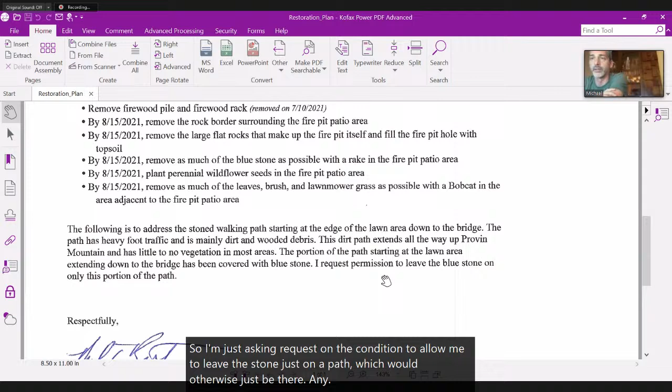So that's my plan. Thank you.

Meredith, can you weigh in on his request to keep the stone there? Am I muted? No. I think that's fine. I think getting rid of the stone is going to cause more problems.

And it is a commonly used trail. If Mr. Beltrandi, who owns — well, I guess he doesn't own all that. I'm not quite sure where the property line starts and ends, but if Mr. Beltrandi is okay with the stone trail, I think that's okay.

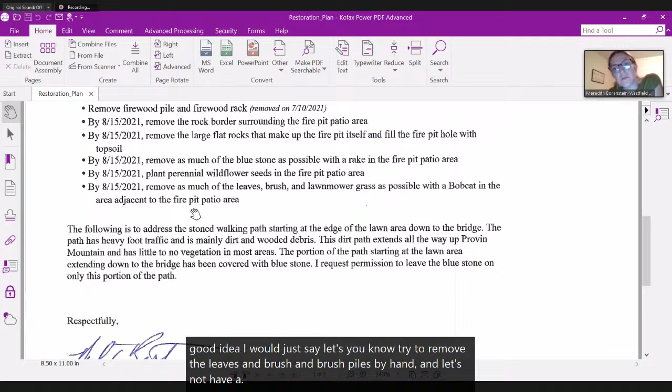And I will comment that I don't think getting a bobcat into the wetland is a good idea. I would just say let's try to remove the leaves and brush and grass piles by hand, and let's not have additional lawn clippings into the wetland in the future.

As far as the timing is concerned, I don't know how much of it I can remove in a 4-week period. So I will do my best and get as much of it out of there as I can. Thank you.

Meredith, is there a shed involved here, or? So the reason, and Mr. Beltrandi has a question here. Should I stop sharing? So this is the enforcement piece, and subsequently Mr. Bryant filed an RDA for a shed on his property. So I wanted the enforcement discussed first, and next we'll open the hearing for the shed. But it was all kind of, one thing had to be done before the next.

I did receive a hold harmless agreement from Mr. Beltrandi. I don't know if you have anything to say about that, but thank you for sending that along. All right, thank you. So I guess procedurally we should deal with the order. Yes, get that clarified, and probably I want to open this up to the commission for any questions or comments, please.

It looked, Mr. Chairman, it looked like John wanted to say something. Do you want to make it clear he's welcome to speak? Yes, I think after the commission speaks, then John's on board. Sure.

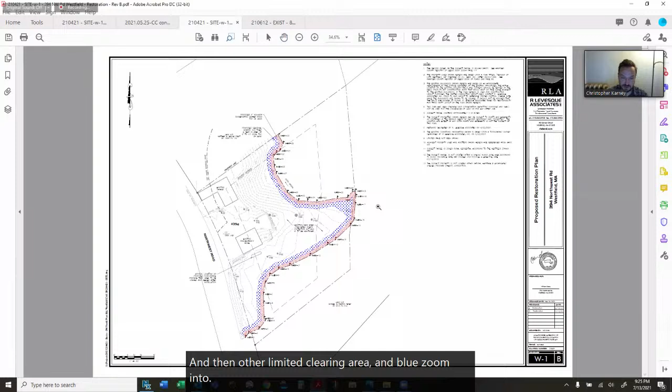Meredith, does this look like what you and Ryan came up with as a solution? Yeah, I had done a site visit in late June, and this whole area was revegetating nicely. It really looked like there was not any disturbance. So my suggestion, I just saw this plan today and I wrote back to Ryan.

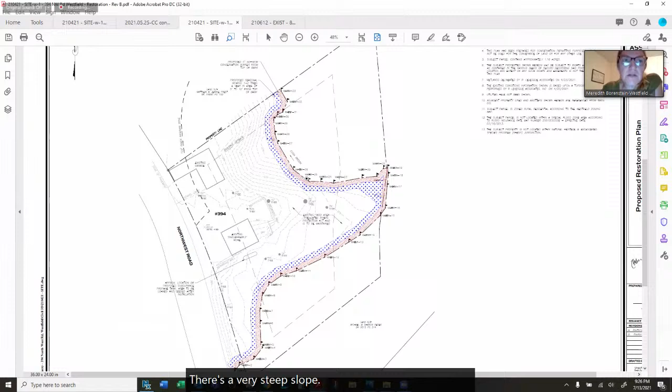I said, between flags mean annual high water 25 and 26, there's a very steep slope and that area is covered in ferns. I suggested we continue the no-mow zone following the 277 contour. That may have been a little overreaching.

Mr. Berry wrote back and said he didn't want to do that. But I will stick with leaving it, and that's fine because there's a low, sort of a basin behind his garage that he wants to maintain. But I was thinking that the area between flag 25 and 26, where it's a very steep slope, should be left—it's just ferns. Mowing it is going to destabilize the bank and the steep slope. So that was my only comment.

Yeah, to me, just not being out on the site, it does look like our contours show the steep slope would be in the no-mow zone. And then in the blue area, the slopes are less severe, in the 1 to 2 year mowing cycle. But is that 10 feet of contours? What is that? These are 1 foot contour lines. So it's kind of only showing 1 foot—I mean 5 feet, not 10. Am I reading that wrong?

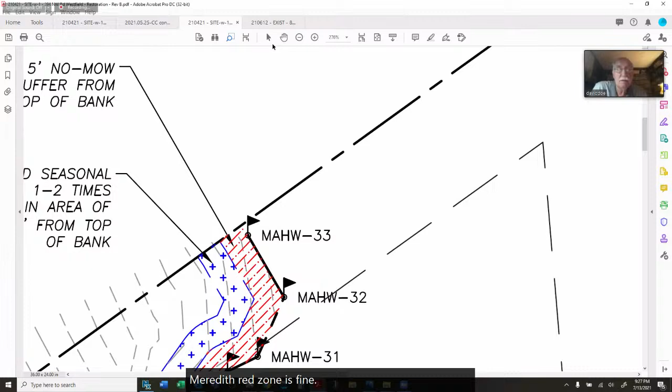I don't think so. Meredith, the red zone is 5 feet and the blue zone is 5 feet. Right, but it's not really matching up with the contours. But it shows a very steep slope, a 1-to-1 slope in that area, where over this 5 feet of no-mow you have approximately 5 feet of elevation change. So do you think the area I was referring to with the ferns is included in that? I can show you guys a photo of the area. I guess Chris isn't going to know because he hasn't been to the site.

Do you guys want to see photos? I'm not sure what to do—approve this plan as is, or how about seeing the photos first? Okay, we just... where am I? Let me share screen.

It's hard to see the slope, but let me run through these. This was in late June. Are those the original photos, Meredith? No, these are—I can show you the original. That's okay, I just wanted to understand what I'm looking at. So when we were first out there, the area was clear cut. There was some soil disturbance, and now it appears quite a bit of vegetation has come back.

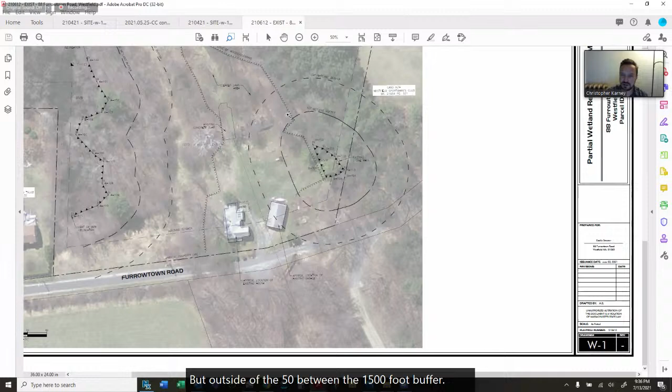As far as the regrading and reseeding goes, Ryan Nelson had done some hand borings in this area, and he found no disturbed soils. He's not only a wetland scientist but a soil evaluator in the state of Massachusetts, and he saw no disturbed soils or major regrading.

So in some ways, it was a cleaning of the site. Chris, there's resource areas on both sides of the house. Is that what I'm seeing? Correct, yes. Can you just show me the 50 and 100 feet for both of them, please?

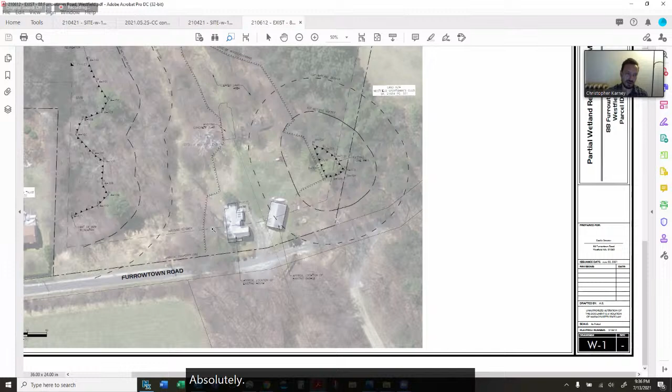Absolutely. On the west side of the site, looking south, you have the wetland resource area on the west side, a 50-foot buffer here, and a 100-foot buffer here. Clearing line is here. As far as the westerly wetland resource area is concerned, no clearing was done within the 100-foot buffer. The other one is an isolated vegetated wetland on the east side of the house.

There was clearing within the buffer, appearing to be between the 50 and 100-foot buffer. Then there was allegedly some regrading in the lawn area and reseeding. Nothing major from Ryan's evaluation and hand borings. From a stormwater perspective, making sure you don't have channelized flows in established lawn areas is good practice. Channelized flows have higher water velocities and pick up more sediment that would end up in this isolated vegetated wetland, so repairing channelization and reseeding can benefit the neighboring wetland area.

Chris, there was an old well I remember from the site visit. Is that on this map? It would be somewhere down in the bottom right corner. Unfortunately, no well is shown on this plan, because when we were there, that was a very wet area with a lot of standing water. But if you guys looked at this, I'm sure you would have picked that up.

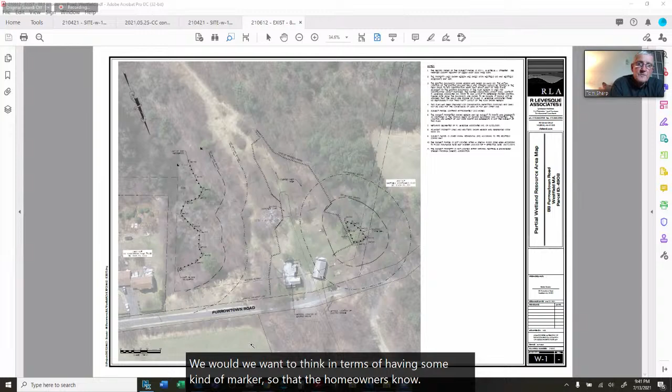Would we want to think in terms of having some kind of marker so the homeowners know that they're within 50 feet of this isolated wetland? We can determine that when we go back out.

All right, so I'll give you a motion to continue when you're ready, Mr. Chairman. One more thing, Chris -- has your company put any stakes at the 50 and at the 100 for both of these? No, I think we haven't. The one on the left, if we walk out there, it's going to be hard to say where the 100 is. Okay, perhaps just a single stake for that side, and then around the isolated one, a stake for the 50 and a stake for the 100, in this clearing area. Yeah.

Okay, to the left of the house there's a solid line that juts to the right - is that the edge of the grass area now? Yes, this is the new tree line. It seems to mirror the old tree line, with the extent of the clearing being in this area. So there was clearing, but it seems to be outside the 50 foot buffer for both wetlands, with the exception of this area here.

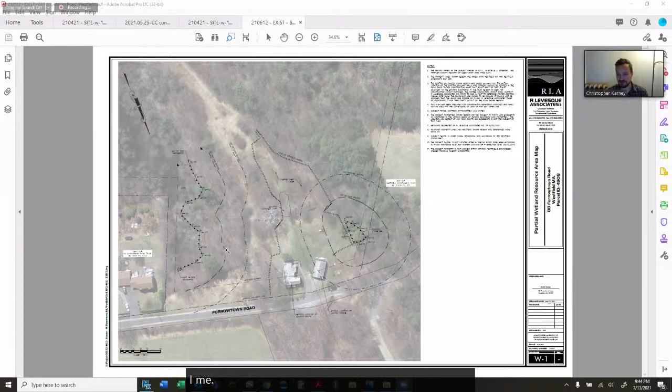All right, it's approaching 10 o'clock, we've got to keep going here. Item E - excuse me, thank you - under item 6, discussion, Russellville Road.

Ratifying the emergency certification. Do you have a motion to ratify the emergency certification? So moved. Have a second? I'll second. Okay, Meredith, anything to add other than what's in our notes? No, I mean, it's an emergency because the culvert is completely rusted out and it's causing unsafe road conditions. They're going to be repaving the road, so they want to get the culvert replaced. It's being replaced in kind.

I recommended they do it in dry conditions, and when I visited the site it was a completely dry stream bed. But with all the rain, it's not dry anymore, so they're going to have to use best management practices and isolate the work area so that there's not flowing water. All right, thank you.

Any further discussion? Seeing none, all in favor? Carl, yes. Jim, yes. Tom, I'll vote yes. Cliff, yes. Thank you. All right, item B, 163 Union Street.

I need a motion to continue until July 27th. So moved. A second? Second. Okay, all in favor? Jim, yep. Tom - I don't, or if you're asking for my vote, I'll vote yes. Thank you. Carl, yes. Cliff, yes. Thank you.